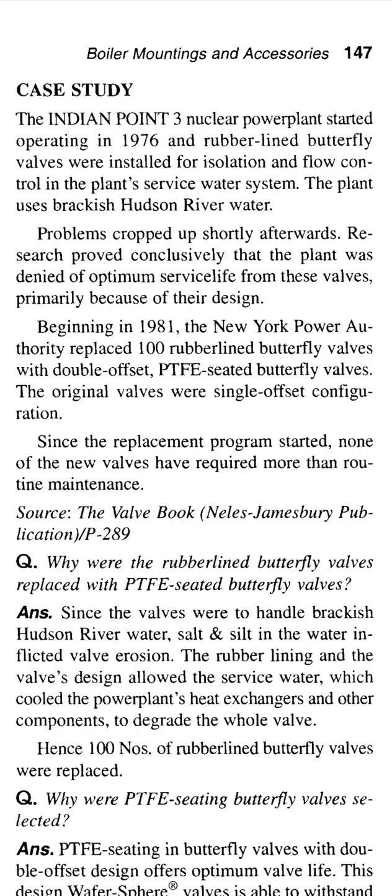Source: the Valve Book, by Jamesbury publication, page number 289.

Question: Why were the rubber lined butterfly valves replaced with PTFE seated butterfly valves? Answer: Since the valves were to handle brackish Hudson River water, salt and silt in the water inflicted valve erosion. The rubber lined valve designs allowed the service water, which cooled the power plant's heat exchanger and other components, to degrade the whole valve. Hence, 100 rubber lined butterfly valves were replaced.

Why were PTFE seating butterfly valves selected? Answer: PTFE seating in butterfly valves with double offset design offers optimum valve life. This design of valve is able to withstand greater pressure differential, up to 2 megapascal. They give more reliable and positive shutoff.

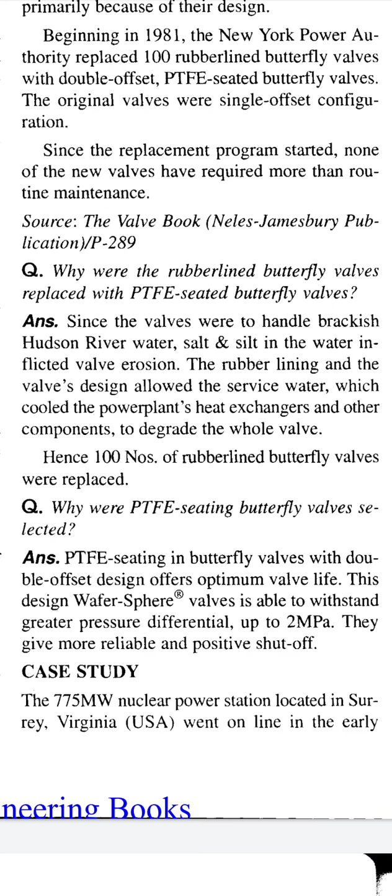Case study. The 775 megawatt nuclear power station located in Surry, Virginia, USA went online in the early 1970s and has been operating continuously for the last 20 years. A program was underway to replace the rubber-lined metal-sealed butterfly valves in the service water system with Jamesbury Wafer-Sphere high-performance butterfly valves with a nickel aluminum bronze body. The project was completed in 1994.

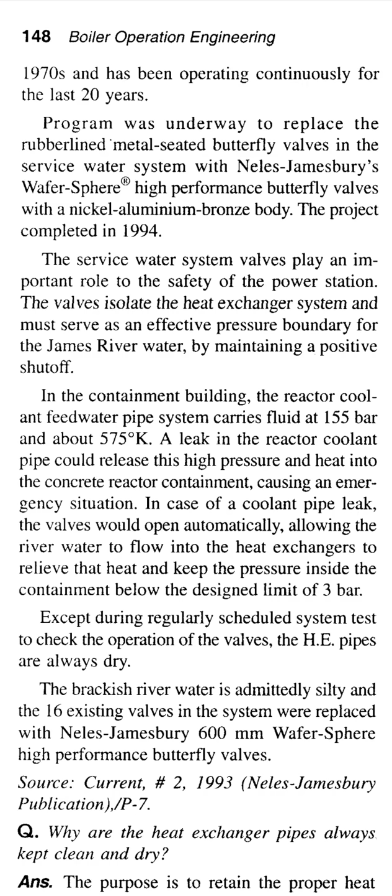The service water system valves play an important role in the safety of the power station. The valves isolate the heat exchanger system and must serve as an effective pressure boundary for the James River water by maintaining a positive shutoff.

In the containment building, the reactor coolant feed water pipe system carries fluid at 155 bar and about 575 kelvin. A leak in the reactor coolant pipe could release this high pressure and heat into the concrete reactor containment, causing an emergency situation.

In case of a coolant pipe leak, the valves would open automatically, allowing the river water to flow into the heat exchangers to relieve that heat and keep the pressure inside the containment below the designed limit of 3 bar.

Except during regularly scheduled system checks to check the operation of the valves, the heat exchanger pipes are always dry. The brackish river water is admittedly silty, and the 16 existing valves in the system were replaced with Jamesbury 600 mm Wafer-Sphere high performance butterfly valves.

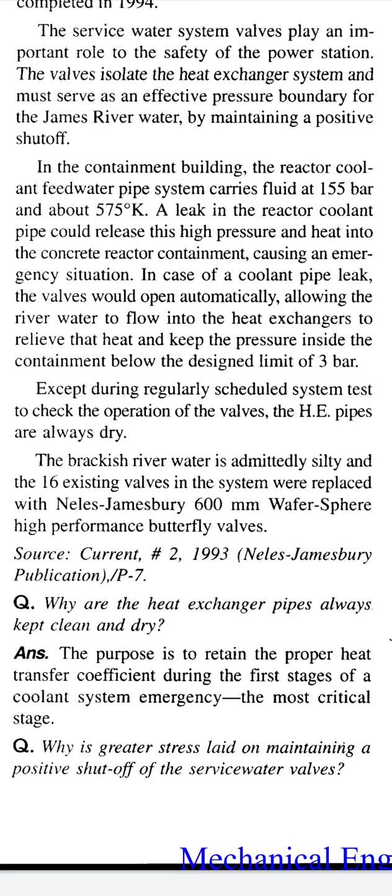Question: Why is greater stress laid on maintaining a positive shutoff of the service water valves? Answer: If river water seeps into the system and is allowed to stand, marine organisms will grow in abundance. This could dramatically change the heat transfer capabilities of the system.

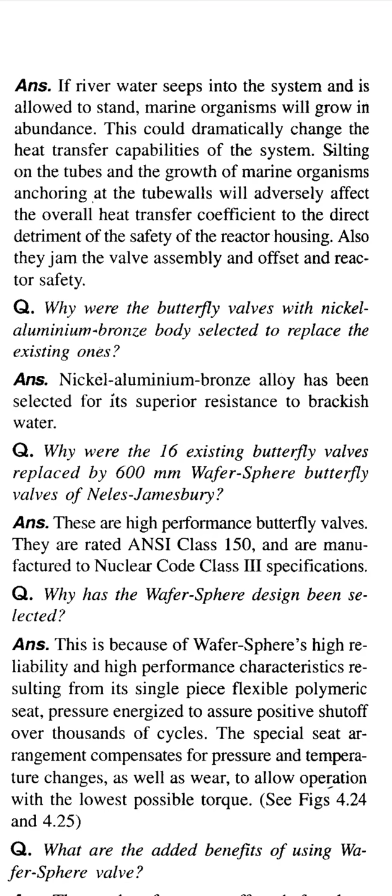Silting on the tubes and growth of marine organisms anchoring at the tube walls will adversely affect the overall heat transfer coefficient, to the direct detriment of the safety of the reactor housing. Also, they jam the valve assembly and offset reactor safety.

Question: Why were the butterfly valves with nickel aluminum bronze bodies selected to replace the existing ones? Answer: Nickel aluminum bronze alloy has been selected for its superior resistance to brackish water.

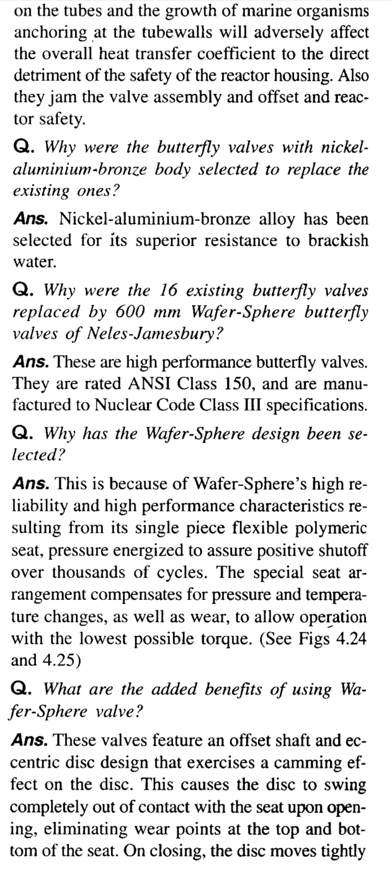Question: Why were the 16 existing butterfly valves replaced by 600 mm Wafer-Sphere butterfly valves of Jamesbury? Answer: These are high performance butterfly valves. They are rated ANSI class 150 and are manufactured to nuclear code class 3 specifications.

Question: why has the Wafer-Sphere design been selected? Answer: this is because of Wafer-Sphere's high reliability and high performance characteristics resulting from its single piece flexible polymeric seat. It is pressure energized to assure positive shut off over thousands of cycles. The special seat arrangement compensates for pressure and temperature changes as well as wear, allowing operation with the lowest possible torque.

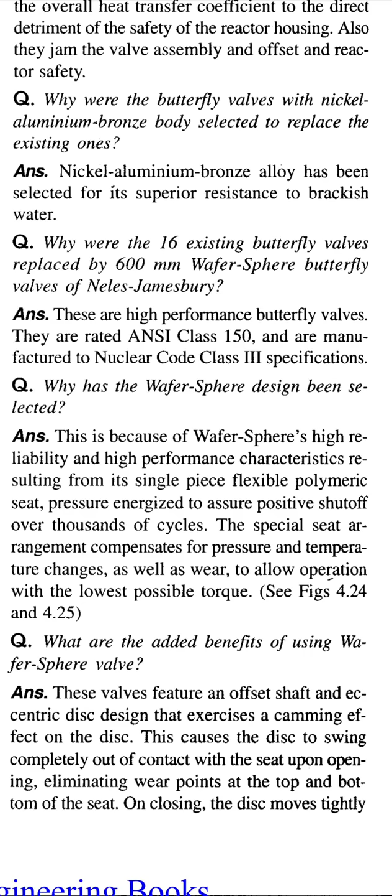Question: what are the added benefits of using the Wafer-Sphere valve? Answer: these valves feature an offset shaft and eccentric disc design that exercise a camming effect on the disc. This causes the disc to swing completely out of contact with the seat upon opening, eliminating wear points at the top and bottom of the seat.

On closing, the disc moves tightly into the flexible lip for reliable sealing around the seat. This sealing design is more effective than the squeeze type seal used in conventional butterfly valves, where the disc is literally squeezed into the rubber or PTFE liner. Should the seat need to be replaced, only the body insert needs to be removed; no shaft or disc disassembly is necessary.

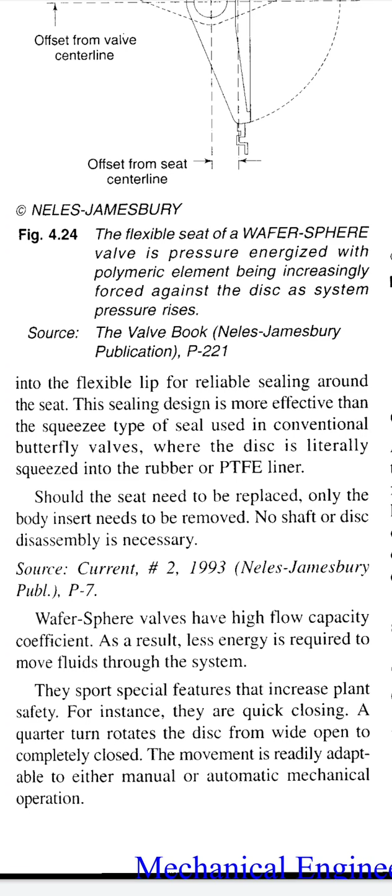Wafer-Sphere valves have a high flow capacity coefficient. As a result, less energy is required to move fluids through the system. They also feature special features that increase plant safety. For instance, they are quick closing - a quarter turn rotates the disc from wide open to completely closed. This movement is readily adaptable to either manual or automatic mechanical operation.

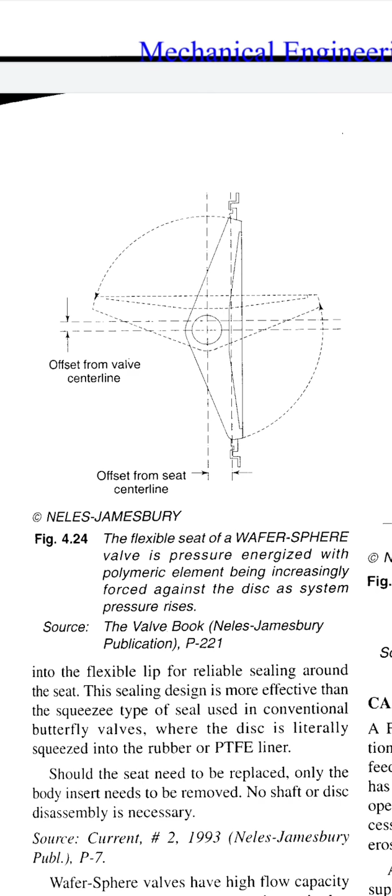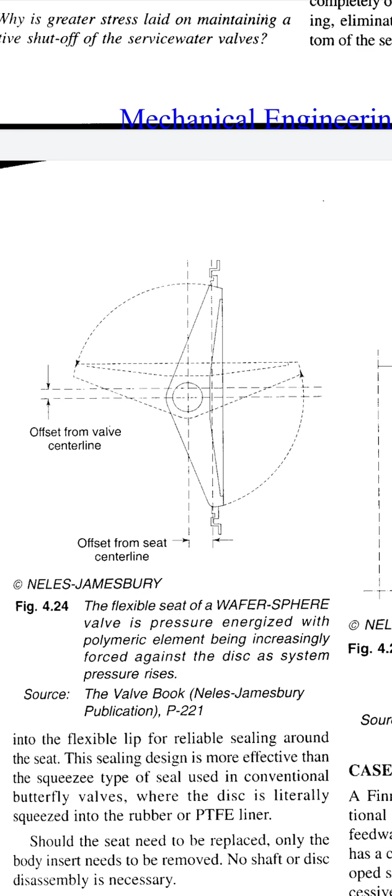In this diagram, we can see the flexible seat of the Wafer-Sphere valve, pressure energized, with the polymeric element being increasingly forced against the disc as system pressure rises. Source: the Valve Book, Neles-Jamesbury publication, page number 221. We can see the offset from the valve center line and the offset seat center line in the diagram.

This is the diagram. The eccentric disc and offset shaft of Wafer-Sphere valves allow full circle sealing of the disc against the inside diameter of the seat.

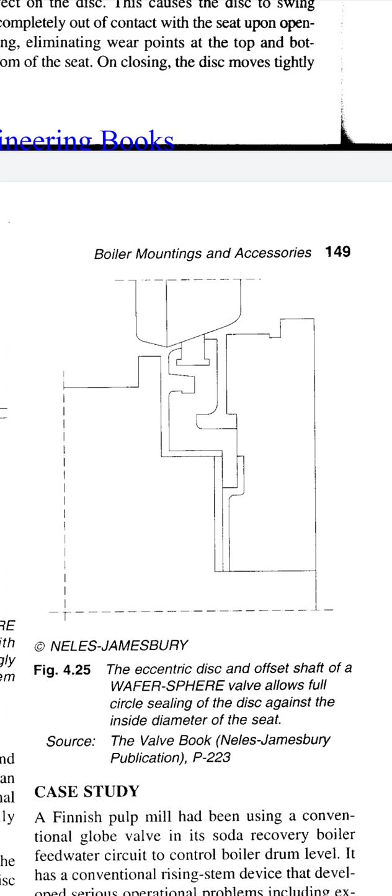Case study: a Finnish pulp mill had been using a conventional globe valve in its soda recovery boiler feedwater circuit to control boiler drum level. It had a conventional rising stem device that developed serious operational problems, including excessive leakage in the control of small flows and erosion through cavitation. As far back as late 1985, Neles-Jamesbury supplied a Q ball valve, PN250, ANSI class 1500, to eliminate these problems, and with the Q ball, the problem got eliminated.

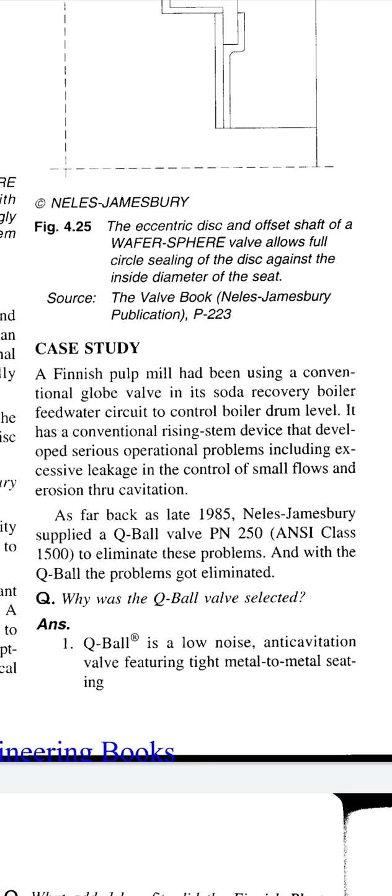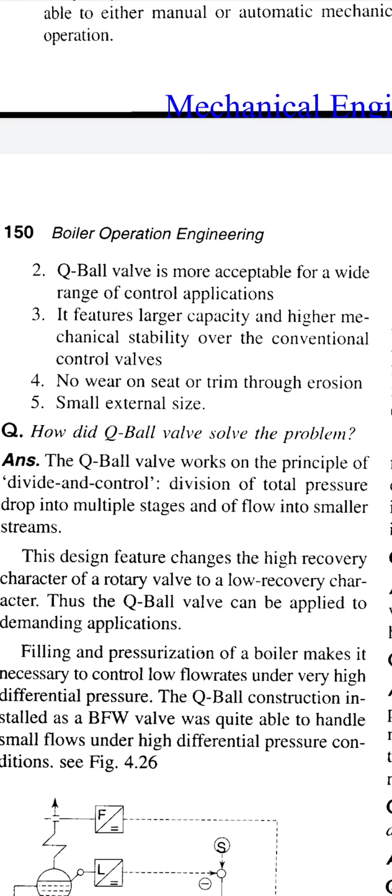Question: why was the Q ball valve selected? Answer: the Q ball is a low noise, anti-cavitation valve featuring tight metal to metal seating. Second, the Q ball valve is more acceptable for a wide range of control applications. It features larger capacity and higher mechanical stability over conventional control valves, with no wear on the seat or trim through erosion, and a small external size.

Question: how did the Q ball valve solve the problem? Answer: the Q ball valve works on the principle of divide and control - division of total pressure drop into multiple stages and of flow into smaller streams. This design feature changes the high recovery character of a rotary valve to a low recovery character. Thus, the Q ball valve can be applied to demanding applications.

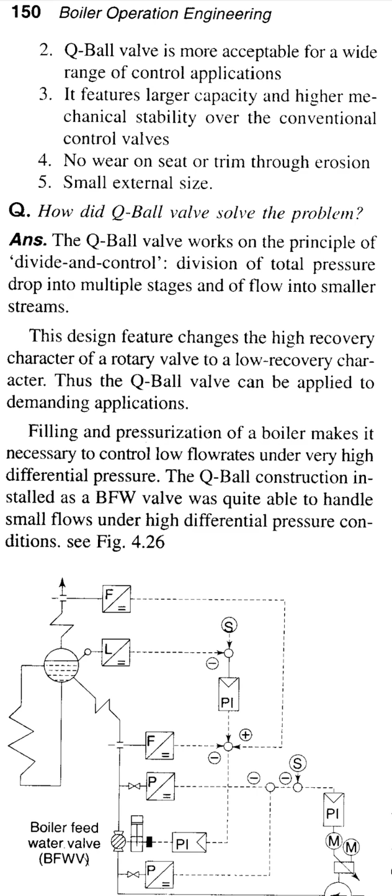Filling and pressurization of a boiler makes it necessary to control flow rates under very high differential pressure, low flow rates. The Q ball construction installed as a boiler feed water valve was quite able to handle small flows under high differential pressure conditions.

You can see in the figure a typical feed water level control system using a Q ball valve to control boiler feed water flow to the boiler drum. Source: the Valve Book, page number 286, Neles-Jamesbury publication. In this diagram we can see the boiler feed water valve arranged after the boiler feed water.